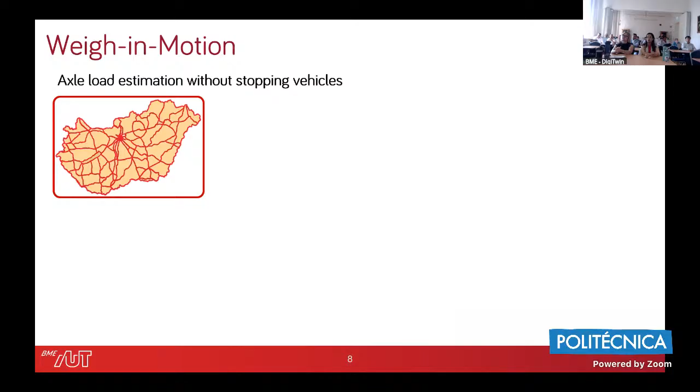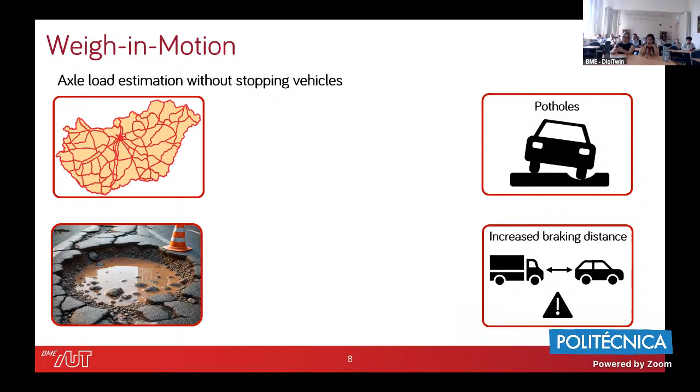Axle load estimation is a really important task when maintaining road infrastructure, because if we do not enforce regulations, we will have potholes, and the braking distance will also increase. It is also a safety problem. That's why we need weigh-in-motion systems. The most commonly used are pavement weigh-in-motion systems, where the sensors are embedded in the asphalt pavement to measure the axle loads. What our research group has developed is a bridge weigh-in-motion system. It is a bit different, because the bridge is used as a scale, and by measuring the strains and accelerations on the bridge, we want to estimate the axle loads.

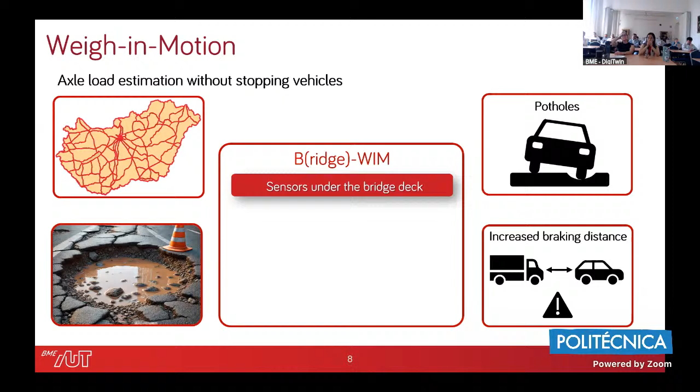What are the main use cases, advantages and disadvantages of a bridge weigh-in-motion system? Sensors are placed under the bridge deck. We commonly use strain gauge sensors, but acceleration sensors can also be used. These sensors can be installed easily because we do not have to disturb the traffic. They are also really cheap compared to asphalt-embedded sensors. But it is a disadvantage of bridge weigh-in-motion systems that they can be installed only on bridges.

But it is an important thing that, for example, in Hungary or in every country there are big rivers, and if someone wants to cross the river, then they have to go across that bridge. So these bridges are strategic points, and in this way they can be commonly used.

I have already told you that it is a non-invasive solution. So sensors are placed under the bridge deck, and it does not need any disturbance of the traffic. We do not have to do anything with the asphalt as well. So that's why it is a non-invasive solution.

The installation costs are lower when compared to pavement weigh-in-motion solutions because the sensors are cheaper, and also the installation is cheaper. Repair and maintenance is also easier because if one sensor goes wrong, then we just have to go under the bridge and repair that sensor.

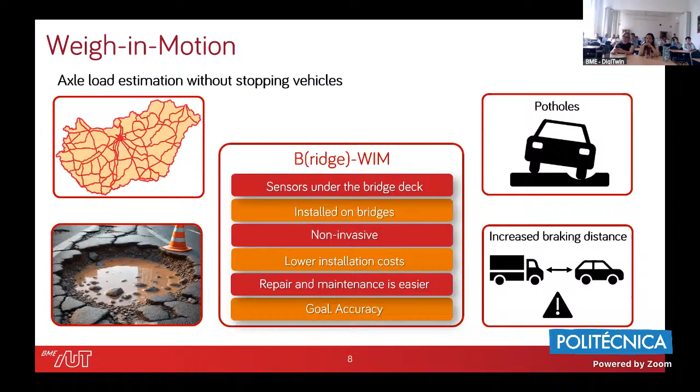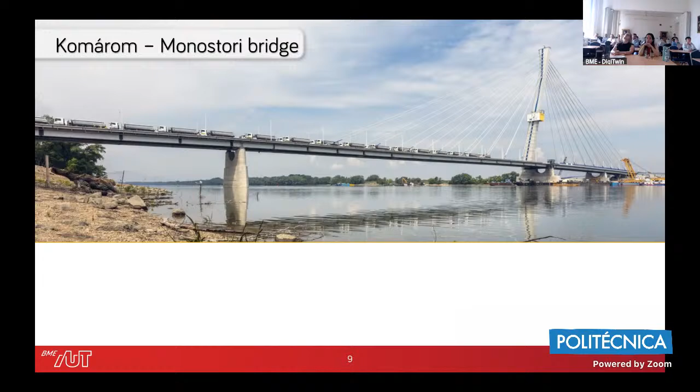And finally, why these bridge weigh-in-motion systems are not widely spread: because the accuracy needs to be further refined. So our goal was to refine the accuracy and the precision of that system. We have a prototype on the Monostori Bridge in Komárom. It is a bridge over the Danube River, and we have strain gauges installed in that cross section.

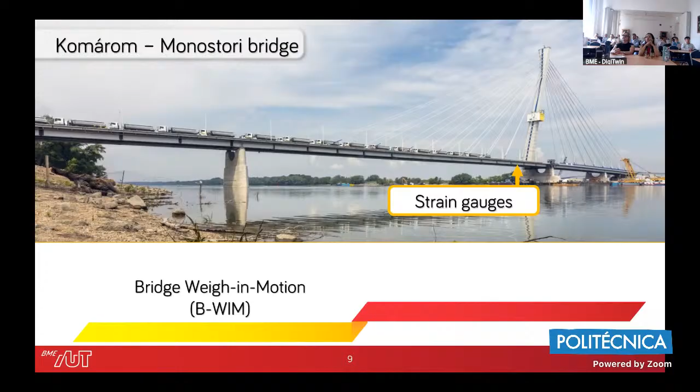And our first goal is to create a bridge weigh-in-motion system that can estimate the axle loads of the crossing vehicles; that is the short-term goal. But in the long term, the goal is creating a structural health monitoring and real-time digital twin system where the bridge weigh-in-motion monitoring data can be used. So we want to create a digital twin system, not only a structural health monitoring system.

Structural health monitoring systems in bridges have really wide literature. What we want to do is a digital twin based on the weigh-in-motion data. So in the case of structural health monitoring, we have the monitoring, so we have strain gauges, temperature sensors, and so on. And we have measurements at some given points.

But using the signal measured and using the finite element method model of the digital twin system, we want to create a real-time structural twin, so that we can measure or simulate the structural data for every point on the bridge structure. And here comes the bridge weigh-in-motion system, because if we have the vehicle data, then we can simulate everything with the finite element method. And in this case, we can update the finite element model based on what we have already calculated.

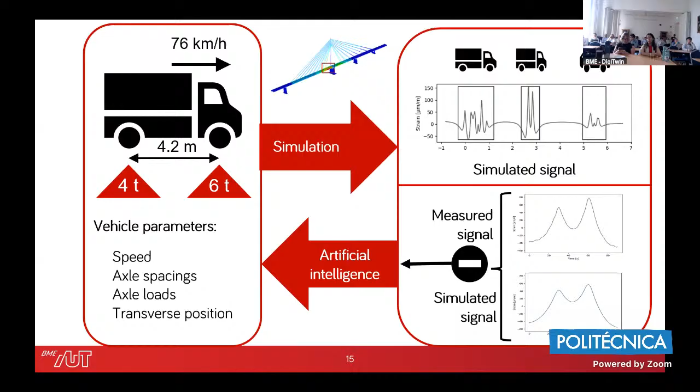What are the main challenges where this Moses algorithm needs some refinement or cannot be used? So this Moses algorithm is basically used for axle load estimation. It is not used for speed estimation or for axle detection. The main challenges are, for example, when there is traffic in more lanes. If there is only one lane, then it is an easier task. So bridge weigh-in-motion systems for one-lane railway bridges are developed frequently. Those were already known in the 90s or at the beginning of this century. But if there are more lanes, then it is still a complex task. How can we handle more lanes?

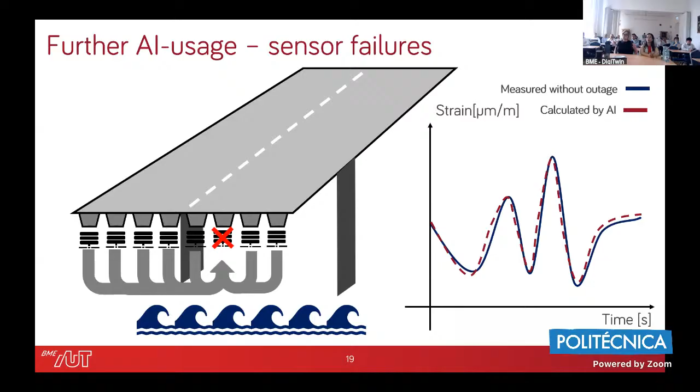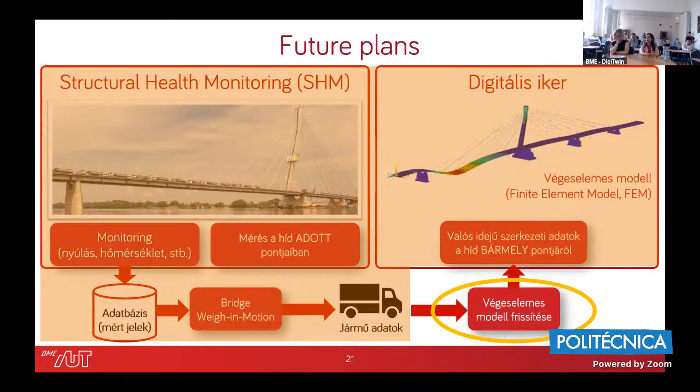And finally, you can see that those modules are already implemented in our case. What we need is, it is in Hungarian, so the update of the finite element model is needed.

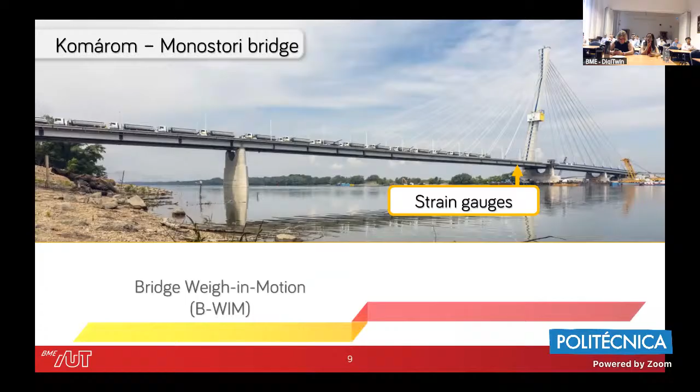Our main short-term goal is to enforce regulation. So it is the most useful, for example, for the public roads and for the infrastructure maintenance. The short-term goal is this bridge weigh-in-motion system that can be used for regulation enforcement, but for the long-term goal, we want to create a real-time digital twin where bridge maintenance actions can be prioritized based on the calculated data.

And that's the long-term goal, but in the short term, I think you have the same everywhere, because we have a lot of problems in France with huge trucks crossing bridges that are much heavier than the regulation, and one bridge collapsed in France because of that. A truck of 50 tons crossed a bridge limited to 19 tons. But the thing is, we need to control the weight of the truck before entering the bridge, not when they are already on the bridge, because it's too late.

Yeah, there are two gaps in this case, I think. One is that we want to control that there are no trucks over 40 tons, for example, but on the other hand, from the view of the state, they want to make these trucks pay the fees. And that's also a very important thing because now there is a lack of infrastructure for this. There is an infrastructure for this in Hungary, but it could have lower costs, and it can be made more widespread if it can be generalized for reinforced concrete bridges.

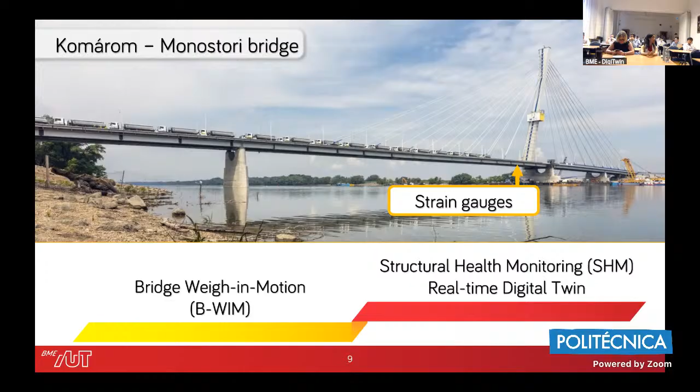Another point, the use of your work, especially for orthotropic steel decks on the stiffeners. Do you use your results to calculate fatigue resistance? Because you have access to all the strain data. So since I am an IT engineer, I work mainly in a data-centric way. Not for the civil engineering part, but we also have the measurement part, so Völgyi István. Because I'd like to know exactly where you put your sensors here.

On the stiffeners? No, on your chart before. Yeah, here. So this point exactly here where you put your sensors. Here we can have local fatigue issues, and it could be very useful to also use your data to control fatigue cycles. Yes, it can also be used as fatigue data.

And if I understood correctly, you put the sensor exactly at the pylon because it's a rigid part, and you wanted only the local deformation. Normally, when we want to do SHM on a long bridge like that, and you want to match your measured data with finite element models, we put sensors also in the mid span, where it's very soft, to be able to match with eigenmodes and eigenvalues, but you are not interested in that.

In this case, this sensor location was because we had constraints, so we couldn't locate sensors here because of the electricity. Because you would have had to put a long wire to plug in. You needed electricity. Yes. So the electricity was in the pylon, and that was a really hard constraint for us to place the sensors near the pylon. For the local and transversal deformation, it's quite smart actually, because you only access the local deformation from the tires and the axle, and you don't need the global deformation of the bridge. We do not need the global.

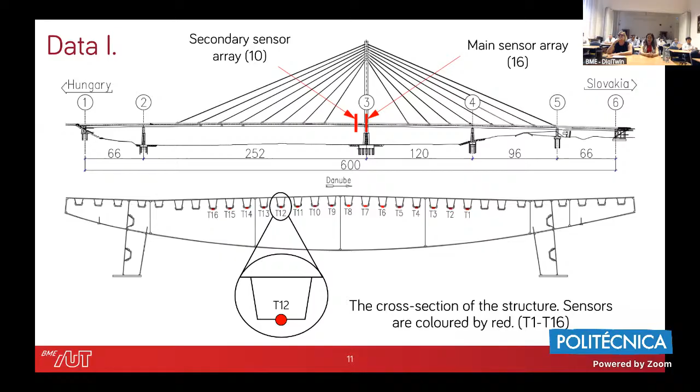Because what we found very difficult is, you have your digital twin bridge. You can do simulation. You have results, so virtual results, and you have your measured data, and they don't match. So you are trying to tune your finite element model, but you have so many parameters in your model, so you don't know which one exactly you have to change to match with your measured data.

Sometimes maybe it's the abutment, or maybe the friction in bearings, or the cable state or whatever. And you have so many different parameters possible, and you are like guessing, oh, maybe I will change these parameters. Oh, no, it's not that. And you go back, and when you have like hundreds of parameters, I don't know how you will. Do you have any, maybe, AI algorithm?

For this orthotropic steel bridge, the finite element model was really good, so it was really accurate. It is a more current problem for the reinforced bridges. There, the simulation of a reinforced concrete bridge is not so easy. That's where we came to this problem. You have already defined, so we are working on that. Yeah, but for the reinforced, yes, you couldn't.

I think what you said in the end, if I understood, it is too rigid to have the local deformation of each axle on the reinforced concrete bridge. Sorry, so the reinforced concrete bridge. Not steel, concrete. Yes. To understand what you said, the difficulty you have with the reinforced concrete in the end, this one here, it's because you don't have local deformation for each axle. It is too rigid. Yes, yes.